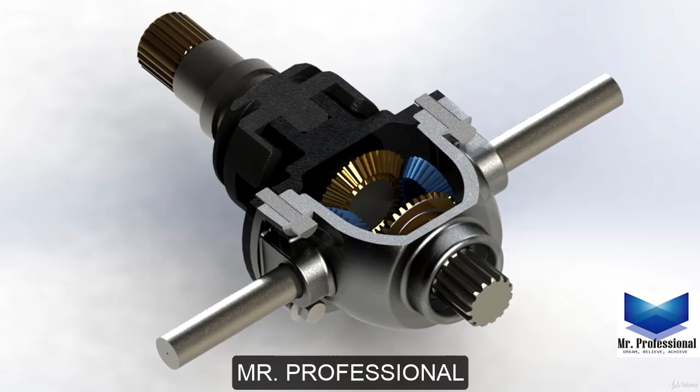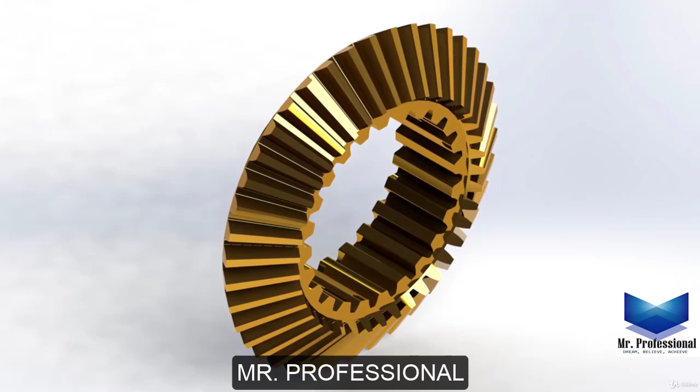In this video we are going to build the first gear that will be fixed to the shaft. The gear is conical, or it's called a bevel gear, and it seems very hard, but don't panic. The conical gear or the bevel gear is already on Solidworks library. We will just configure the settings to get the conical gear that we want.

So let's begin by creating a new file, but this time we are not going to create a part design, we are going to create an assembly, because only on the assembly we can edit the settings of a bevel gear from the library. On the part design we cannot edit the settings of the conical gear. So let's go by creating a new file, a new assembly file, and I will show you how to create the bevel gear. So the library here is on this right side, design library, toolbox,

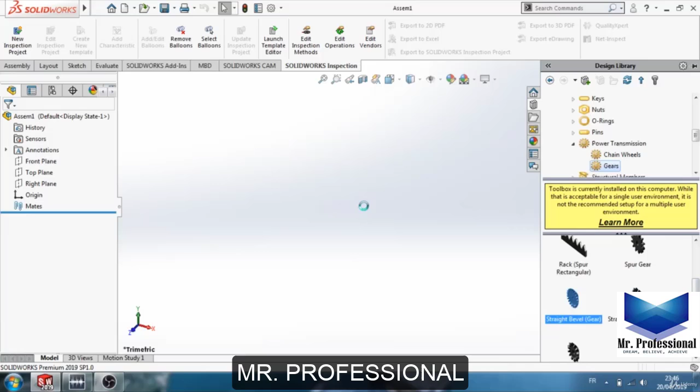Click on add in now. Wait for a minute. Good, now we have the toolbox, so click on it and scroll down until you find the ISO file, and here you can find power transmission, gears, and here you have the bevel gear. So let's click on it. There you go. And this is the last one that I used, that's why it's like that.

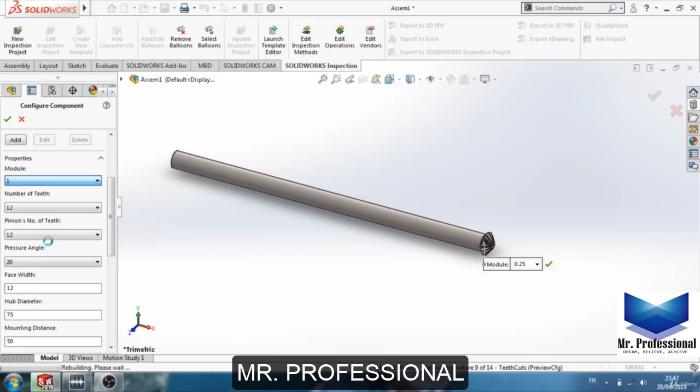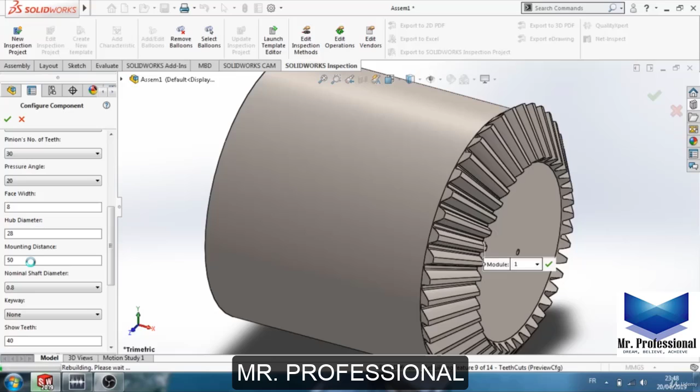So here we have the settings, and now we will add our conical gear settings. So here we have 1. Okay, the number of teeth should be 40. Good. The pinion's number of teeth should be 30. Keep the pressure angle on 20, and let's change the face width. Face width should be 8. The hub diameter should be 28. And the mounting distance should be 50.

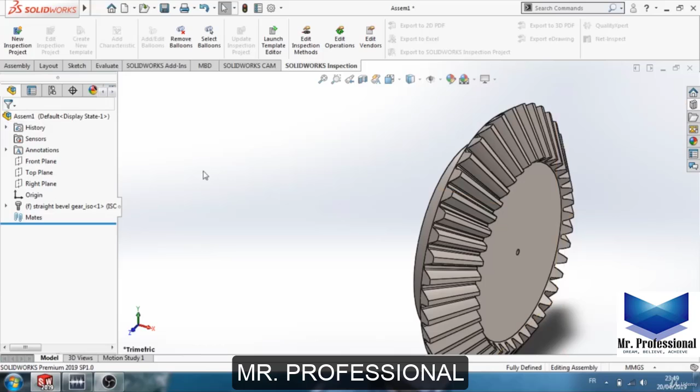Perfect. Now we have the gear that we need. Now we can click OK. So now they show you another one if you want to create a lot of conical gears, but we are not going to do that. Just click on cancel. Good. Now we have the conical gear that we need. Let's just add a color in, and let's make it a golden color.

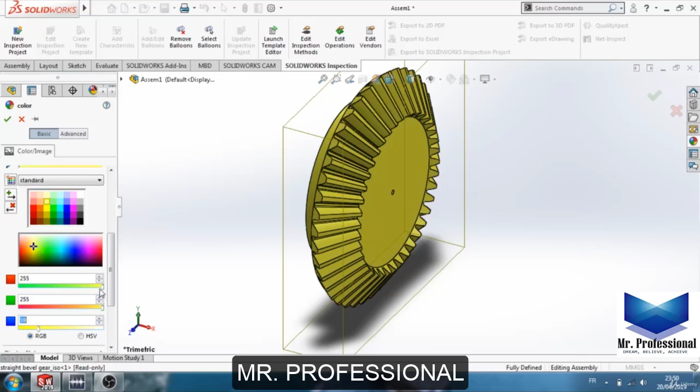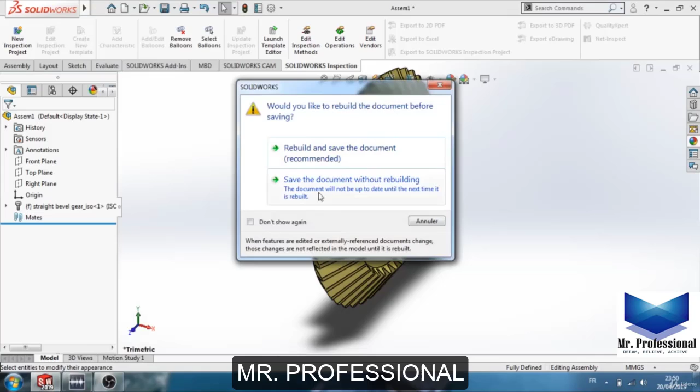Good. Click on OK, and now what we are going to do, we will save this gear, but we will save it as a part. So click on rebuild and save the document, and we will save it as a part and not as an assembly. So let's change the type to part here, and let's choose, there you go, this is our folder, and I will call it gear 1.

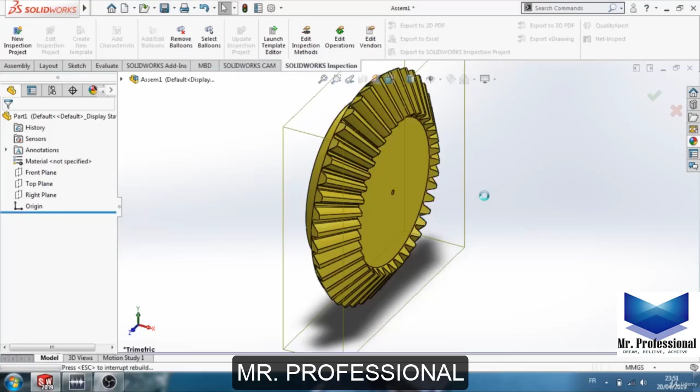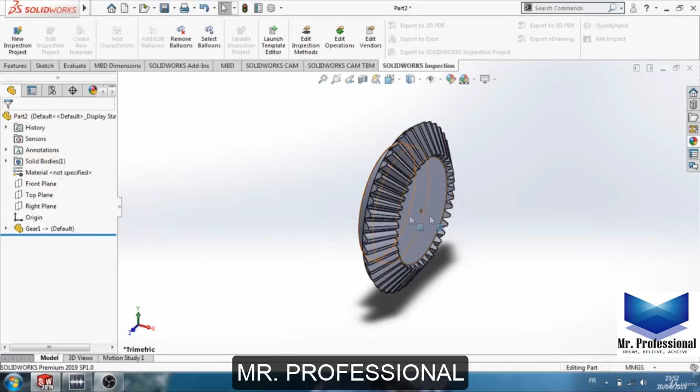There you go. Now you can close this, don't save, and let's create a new file, part design. Okay, and now let's add our gear that we just created. So let's insert our part, which is the gear 1. So let's insert another part, which is the shaft. Let's add it somewhere here.

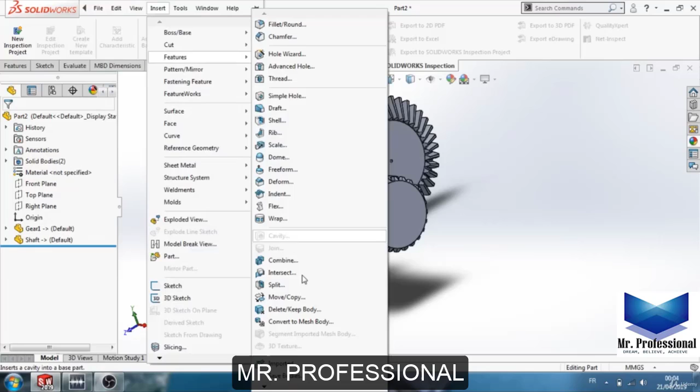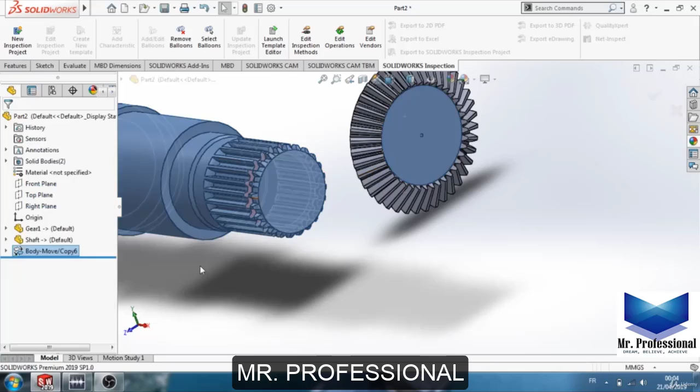Good. Now let's go to insert and let's add a feature called move or copy. The body to move should be the shaft, and for the mate settings I'm going to select this face and this one, and then click OK. Let's see how it goes.

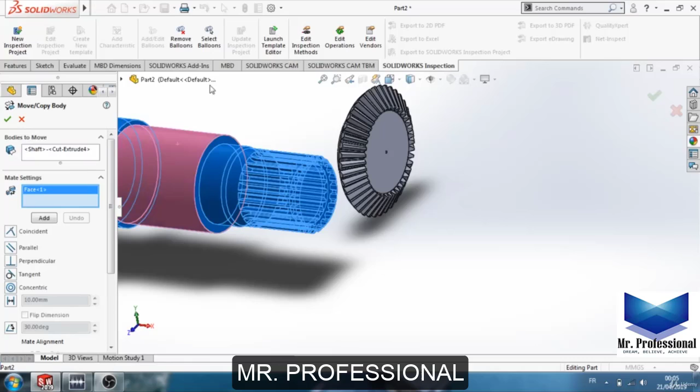Perfect. Let's add another one. Insert, features, move or copy. The body to move should be this one, and in the mate settings I'm going to select this face and this one. So now the two parts are on the same center line. Let's click OK, and there you go. Now we have the form that we need.

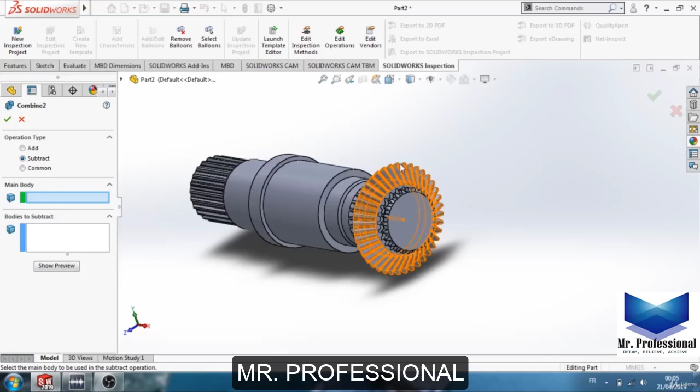So now I'm going to add another feature called combine, and let's click on subtract. The main body is the gear and the body to subtract is the shaft. Let's click OK, and now we have the bevel gear or the conical gear that we need.

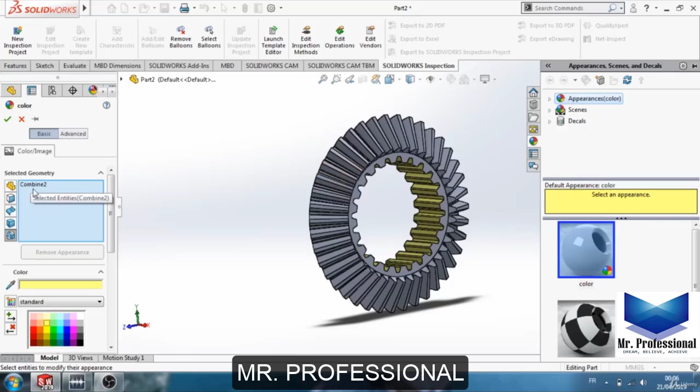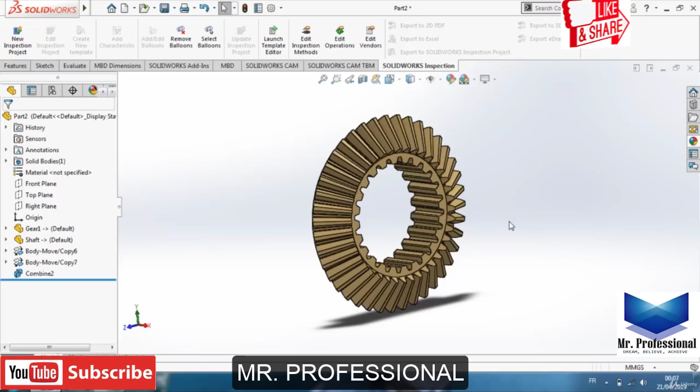So now let's change the color. Okay, good. And now we have the part that we need. So in the next video we are going to build another gear with the same settings, but I'm going to add some parts to the gear. So see you on the next video, and peace out.